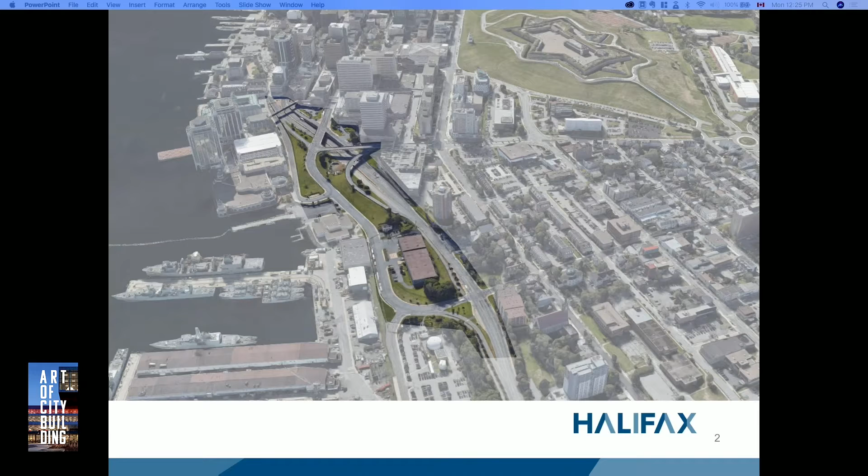But before getting into the exciting details from the public engagement sessions, I would like to provide a brief overview of how we got to where we are today, particularly for those who are not that familiar with the project. The Cogswell Interchange includes approximately 22 acres of land immediately north of the downtown of Halifax and east of what is known as the north end of the city. It's bordered by Cornwallis Street in the north and historic properties in the south.

The Cogswell Interchange is a visible reminder of an era accompanying post-World War II suburban growth in Halifax, and it was part of a much larger project, Harbour Drive, a multi-lane freeway planned to run along Halifax's waterfront the entire length of the peninsula. Now, the interchange was built during Halifax's urban renewal era and resulted in isolating the north end from the downtown and displacing the area residents, as you can see on the right side of the screen. But it was public concern about the heritage destruction, and in particular the potential destruction of what we know affectionately today as historic properties, that eventually halted the completion of Harbour Drive, but not before the Cogswell Interchange was actually built in the early 1970s.

Now today, Cogswell remains as an underutilized single-purpose orphan piece of transportation infrastructure, often described as the road to nowhere. There's been much discussion about its removal actually, and in fact, we've always been talking about tearing it down and replacing it since the first day that it was completed. And interestingly enough, we're not alone in this quest to actually fix or right some of our urban renewal mistakes. We look to Vancouver and their Viaduct project, we look to Montreal and their Bonaventure project, and we also look to Toronto and their Spaghetti Junction in Etobicoke, all very, very similar projects.

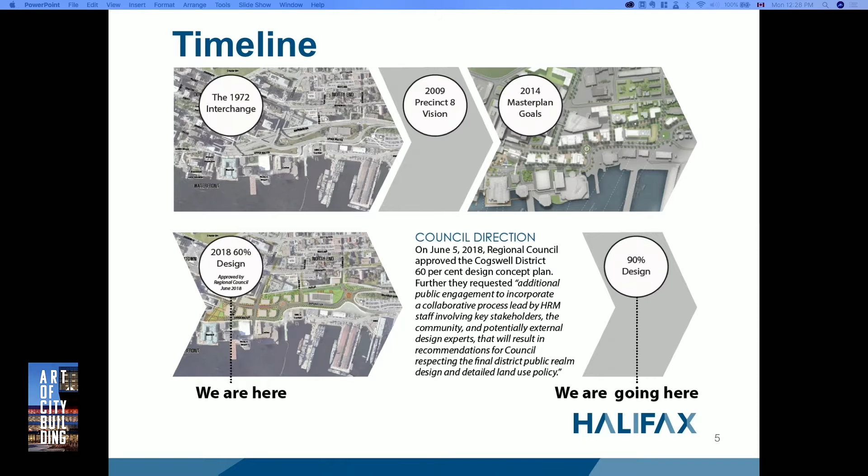Now, the vision statement goes on to say that we need to develop a Cogswell Interchange area master plan, and that should be undertaken. In fact, in 2013, that is what happened, when the municipality engaged Ekistics Plan and Design, a local design company, to develop the master plan for this area.

Input from a significant public engagement session, affectionately known as the Cogswell Shakeup, held in May of 2013 and involving approximately 500 people, served to confirm the direction of the master plan exercise. In May of 2014, our regional council adopted the Cogswell Lands Plan as the area master plan for Cogswell.

The specific objectives endorsed by regional council as part of that plan included, first, that it should be a walkable and transit-oriented neighborhood, with densities supporting increased use of transit. It was also a major objective to reconnect the northern neighborhoods and the areas to the west, to both the downtown and to the waterfront.

Thirdly, to reestablish the fine-grained street grid of the downtown that had basically been obliterated by construction of the interchange, as well as to include well-designed private and public spaces within the new neighborhood. It was proposed to be a mixed-use core, residential being a priority, but ensuring commercial uses to support that new neighborhood, which may comprise approximately 2,500 people.

Prioritization of active transportation is key, and last but not least, there should be a renewable energy district as part of the project. Based on these objectives, staff were directed to take the 2014 Cogswell Land Plan and initiate the detailed design.

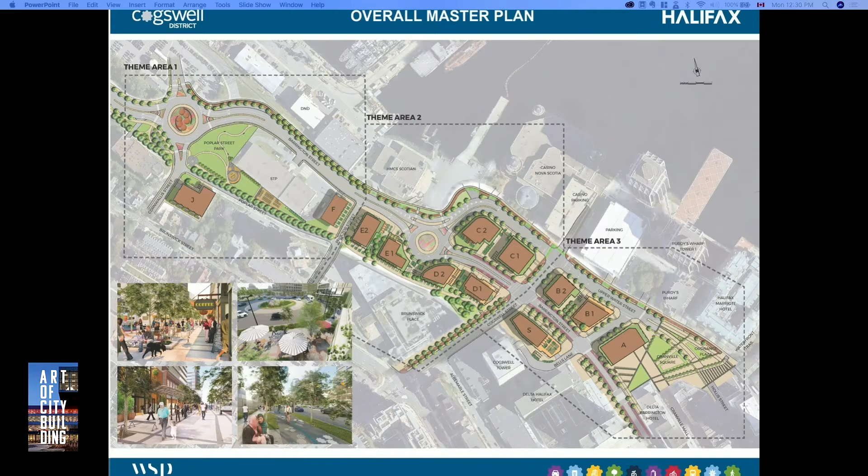It was explained to Council at that time that the design of the public spaces was still very conceptual and required substantial additional work between 60 and 90%. Similarly, it was explained that the design provisions for new buildings had not yet been tackled.

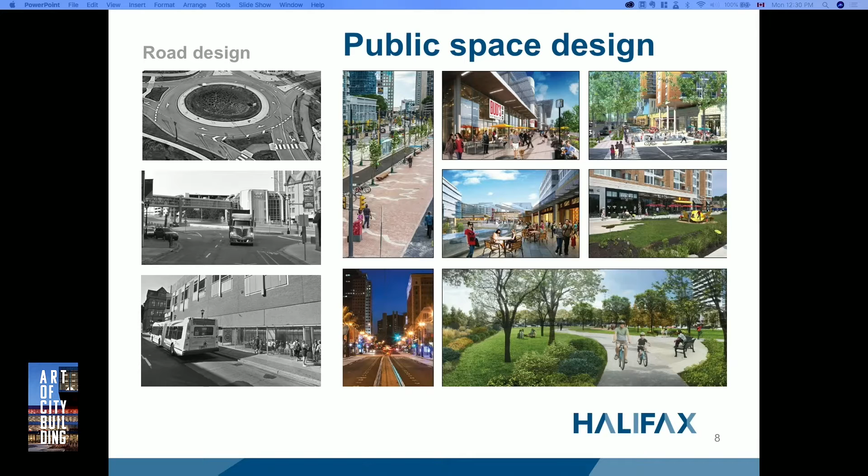Consequently, part of Council's approval of the design was to request staff to undertake additional engagement through a collaborative process led by staff but involving key stakeholders, the community, and potentially external design experts, that will result in recommendations for Council respecting the final district public realm design and detailed land use policy.

Regional Council recognized that the design of the public realm and the relationship of the public spaces to the buildings and their design are key to truly realizing the vision for the district. This would elevate the plan from merely a functional design, showing where things are going to be located and how big they are, to the all-important elements of design: how are we actually going to feel here? How can we ensure we're going to enjoy the space? How can we make it fun, lively, and a place where we want to be?

They also recognized the consultation should be broad-based, involving citizens from across the municipality. To help us with this, we engaged Fowler, Bauld & Mitchell, a local architectural firm, to develop a robust engagement plan and carry it out in conjunction with ourselves and our urban design company, WSP, based in Toronto.

One of the things FBM are well known for is the engagement process that was used in the design of this great building that we're sitting in today.

Also as part of the process, we became quite excited about the opportunity to collaborate with the Downtown Halifax Business Commission and stakeholders on what we're calling the Gehl initiative. We're delighted to have Gehl, a renowned urban design firm, play a constructive role in helping us complete the 90% plan.

I now want to spend the rest of the time I have with you sharing the details of the engagement process, but more importantly, some of the exciting ideas that have surfaced from the session.

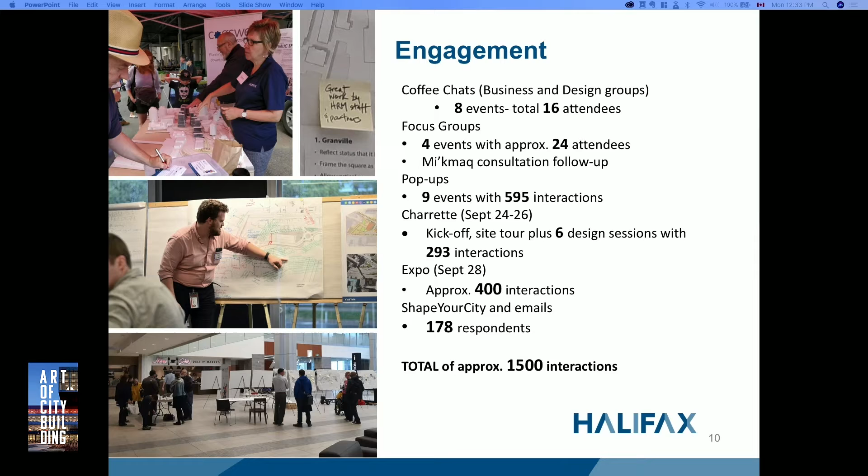In terms of the total interactions through this engagement process, there was well over 1,500 forms of interaction, whether online, in person, or otherwise.

We also included, thanks to FBM—and I wish we had done this a couple of years ago—a 3D model, which was a very effective tool in helping to explain the design to date and engage the public regarding the public spaces and building design discussions.

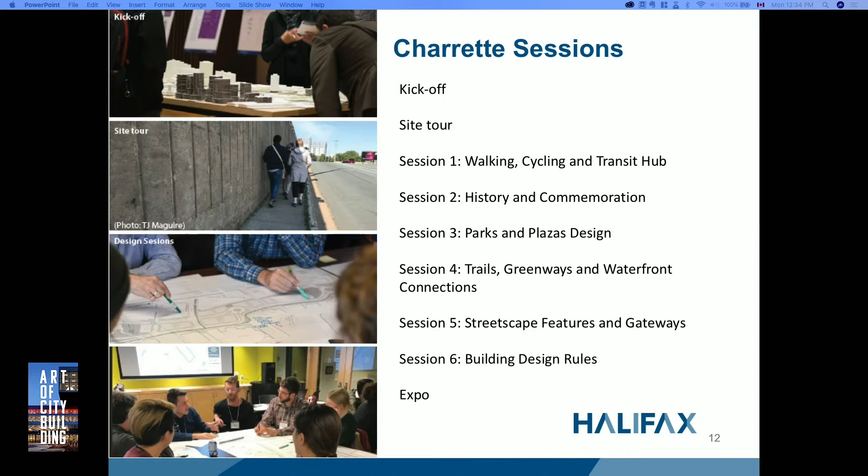The charrette itself consisted of 6 sessions, 5 of which dealt with the public spaces that need further designing within the development, and one session dealt with starting to delve into the ideas around urban design and the building designs themselves.

In terms of the public space opportunities, following on from Ethan's presentation, we not only have 10 great opportunities, we actually have 11 great opportunities within Cogswell. I want to go through those quickly with you.

Starting at the bottom end of the eastern boundary of the project, this is the Barrington Greenway, where we're taking back 9 meters of the traveled way of the street and converting it to public space, a bi-directional bikeway, separated sidewalk, and set within two boulevarded sets of street trees.

It's really exciting—a similar design for the Cogswell Greenway, which extends from the Barrington Greenway up to Brunswick Street, and has the potential of actually continuing on to the Halifax Commons.

Connections to the waterfront are really important. We've identified 4 major potential connections, maybe even 5, which were subject to conversation. A multi-use trail borders the western part of the project boundary, starting in the north, continuing along, following the Cogswell Greenway, coming through the Transit Plaza, and then into the significant urban square known as Granville Square and Ordnance Plaza—a major urban square green space flanking the southern part of the development. Another pocket park, which we had lots of conversation about, is located at the midpoint of the project, and then there's the green space park known as Poplar Park in the northern part of the project.

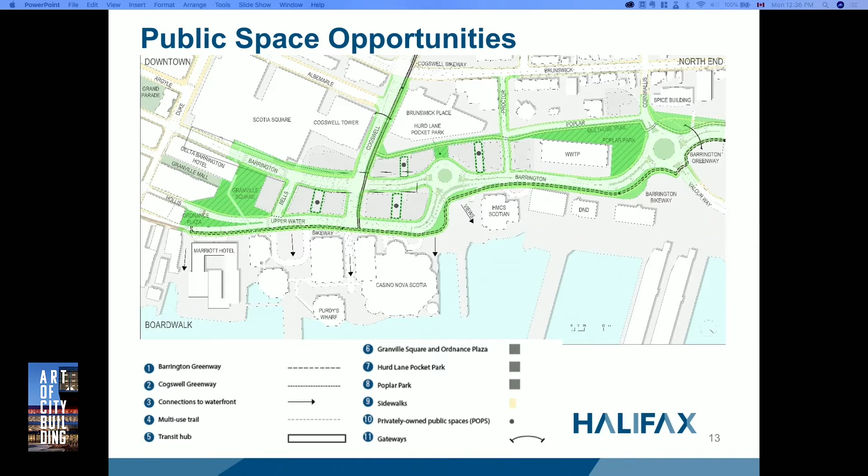In terms of the process, we took those 11 opportunities for creating great public spaces and worked in table sessions using that base map. Ideas were generated at all of the tables, and there was reporting back, which was then consolidated at the end of each session. That occurred over a very intensive 2-day period, including working into the evenings.

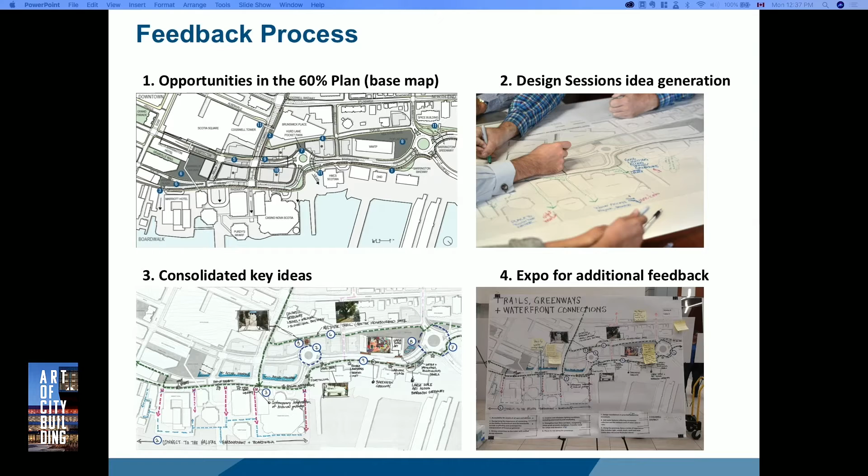The following day, we basically had an expo for gathering additional feedback on all of those ideas. So what I'd like to do right now is share with you some of those ideas.

In terms of walking, cycling, and the transit hub, a lot of people were very excited about the active transportation components within the project. And in terms of the transit hub, there were some great ideas brought forward, including simplifying transit and making it easier to use.

In the transit hub itself, focused on Barrington Street and Bell Street, let's make sure we have exciting, active building frontages in that particular area. And instead of our buses spending time waiting here until they start their routes, maybe we should remove them and put them up on Albemarle Street, for example, to make that a more effective and efficient transit hub.

In all sessions, connecting to the waterfront was really important, and there's a whole variety of ideas that have come forward, both in this session and others, about gateway and wayfinding opportunities to bring people from this area and from the neighborhood to the north into the waterfront area.

Supporting pedestrian activity and movement through this entire neighborhood was identified as a priority, and in some cases some additional crossings and pedestrian crossings and improving the ones planned were talked about.

Connecting the north end to the new neighborhood was an enduring theme, and one major direction suggested was that not only should Cogswell Greenway be constructed to Brunswick Street, but there is strong support for continuing that greenway and bikeway all the way to the Halifax Commons.

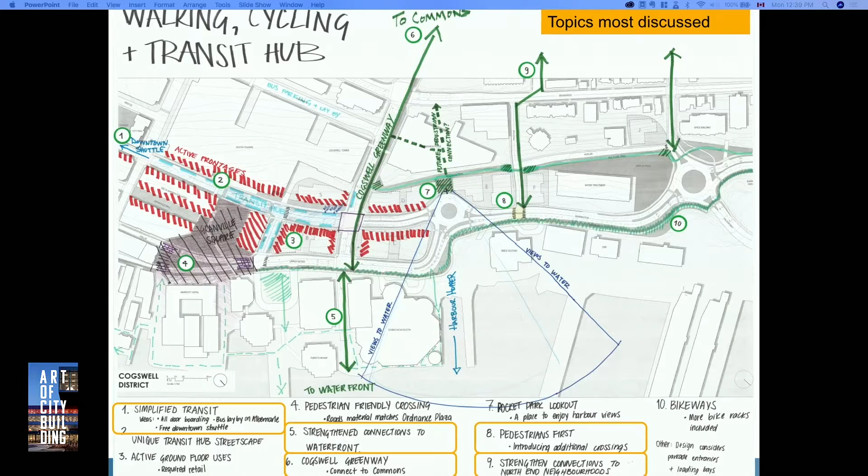There was also discussion about a major area where we need to do some more thinking: how can we, with these new street connections, both Proctor and Cornwallis, really facilitate that linkage to the Gottingen Street neighborhood.

History and commemoration: a variety of topics were talked about, how in this particular area we could celebrate history and commemoration. We talked about ways to commemorate the story of the urban renewal activity that has gone on here, the freeway plan itself, and the fact that it was stopped.

These could be conveyed through ideas like photos of the original neighborhood, keeping a piece of the interchange as a Berlin Wall moment, for example, or even going so far as keeping a large part of the interchange, believe it or not, as an elevated park.

As I mentioned, we met with the African Nova Scotian community and had several conversations with the Mi'kmaq community. What was very clear to us and to them is that their presence in this area, which they've occupied for a very, very long time, is not known, is not seen. They see this as a huge opportunity for them to become involved in making that presence known. So we're pretty excited about that.

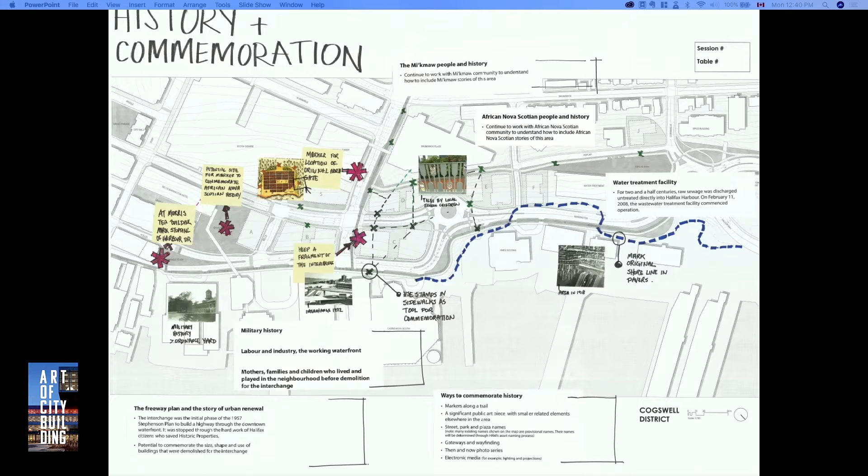We also touched on a number of topics of history relating to the water treatment plant itself, including the original shoreline of the harbor and our military history with DND being so close. We also discussed a variety of ways that commemoration could happen through small and large art projects, civic asset naming, decorative paving, electronic media, and a whole variety of other ideas.

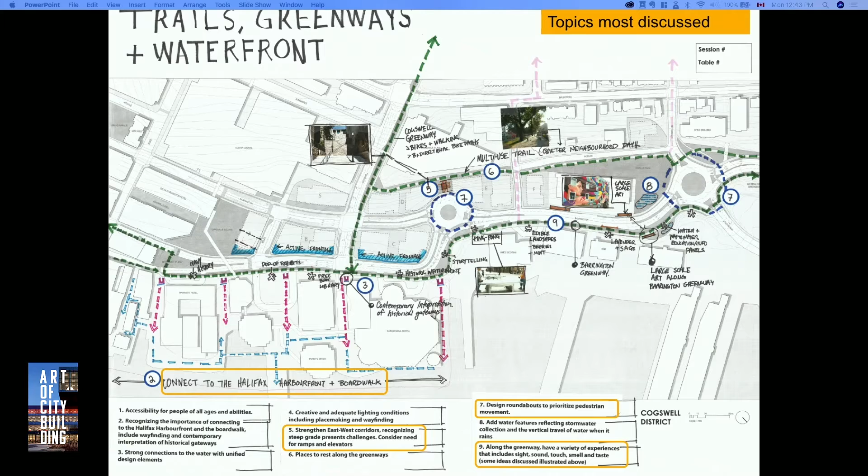Recognizing that the east-west movements in this particular area are quite challenging because of the grades, how do we deal with that? And also along the trails and greenways, have a variety of sensory experiences and activities, such as learning activities, arts and murals, edible landscaping.

Streetscape features and gateways. Highlights here, one of the major ideas was that the intersection of Cogswell Street and Barrington Street really came forward as the heart of the district. And because of that, we should pay particular attention to the designs of the buildings in those areas, their relationship to the street, perhaps some ideas around small plazas based on building setbacks, some unique streetscape elements there.

Maybe that should even be a scramble intersection. The roundabout here in this location was recognized as a predominant gateway and could be space for a marker or public art. As well, all of the sidewalks and greenways here, a variety of street trees should be provided.

I actually have 2 minutes. Gosh.

Over 270 street trees are actually being planned as part of the project. So I just have a couple more slides.

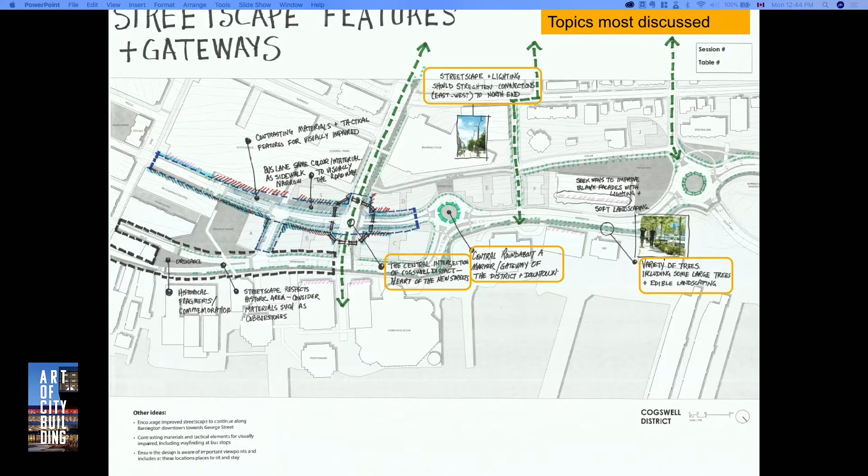Building design. Of all the sessions, this is the one that generated the most amount of interesting dialogue as well as controversial dialogue.

Some of the key ideas were that within this area, we really need to pay attention to the surroundings with respect to the designs of the buildings. The southern end should integrate with the heritage nature of that particular part of the development. The center part is an opportunity for lots of interesting articulation and details at the lower ground floors, varying street faces, and active frontages as well.

It was even suggested here that maybe this is the location for an iconic tower design. And in the north, the design should integrate and relate to and blend into the northern part of the development.

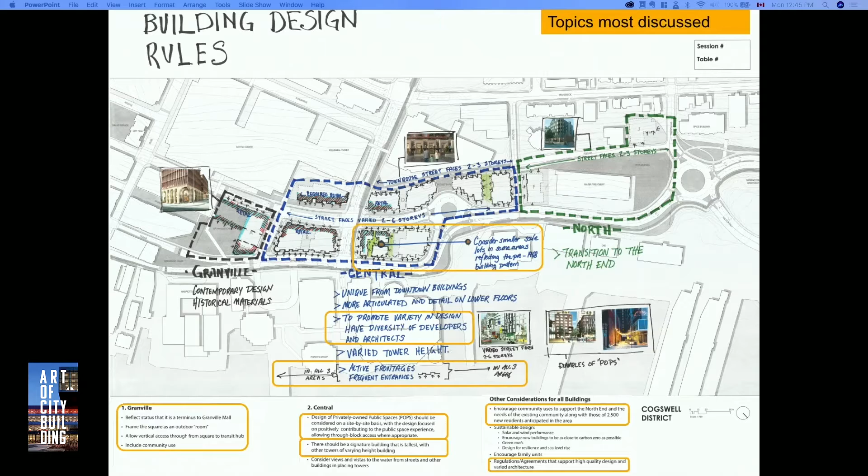Other ideas that were discussed include affordable housing and interim uses on vacant lands. I won't go through the entire list, but there were lots of additional items beyond just the public space conversation. In fact, there were over 100 ideas provided to us through this process on public spaces, and over 50 ideas provided to us on building design.

So the process was very exciting, and we're very pleased with that level of engagement. We think we can really move forward with that input to ensure this is a people's plan for this new district. We're now going to be working with our designer, WSP, as well as GAL, to make sure we can include as many of these ideas as possible, and we think many—if not most—can be included in the 90% design.

So in terms of next steps, our goal is now to work towards completion of the 90% design based on the input we received from the public, take that back to council for their review, and then based on their direction, move forward to engage a constructor and look forward to the demolition and ultimate construction of the new neighborhood. Thank you.

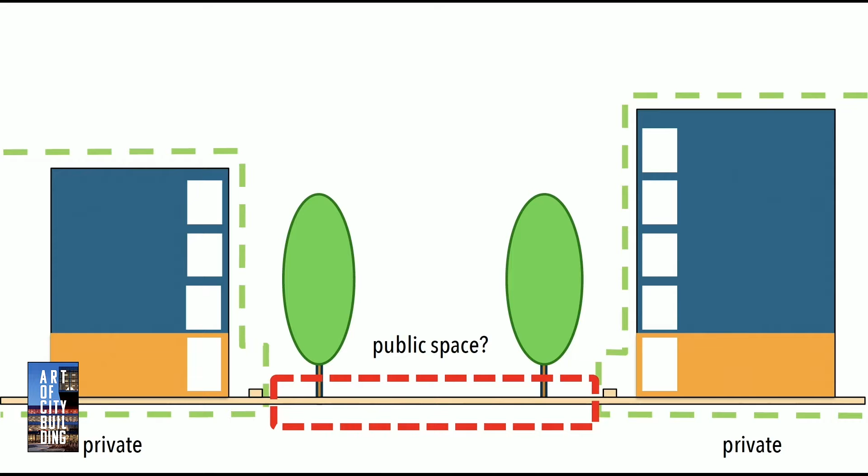Second lesson: when cities talk about public space, they often mean the horizontal surface that they own and manage. So is this public space? But if you take the perspective of the pedestrian, you and me on the street, experiencing the environment - this is not public space, but this is public space, including the facades of buildings. The most important part of the building is the ground floor space that you see when you walk down the street. So what we say is the ground floor may be only 10% of a building, but it determines 90% of the street experience. So actually, with the buildings, you help co-create public space.

Third lesson: there's this difference between space and place. Do you know Maslow's pyramid? This is Maslow's pyramid for human needs. As a human being, you first want to have food, shelter, a roof over your head, and be safe. Once those desires are taken care of, you want to develop yourself, be social with other people, etc.

What we see is that with public space, the city tends to take care of only the first two layers of this pyramid of Maslow. So the public space is clean, it's safe, it's whole, but it's not necessarily a place where you want to be, where you feel at home, where you feel inspired. That's where the place-making idea comes in, and that's something that the cities can't do alone - that's why we need everybody.

That's a co-created process. The fourth lesson we take out of the book is that when we talk about the quality of public space, it's not only about the hardware, the design, the way we design it. Very often, if a space doesn't function, a city will react by having a new design made and then hope everything will be good afterwards. But very often that's not how it works out.

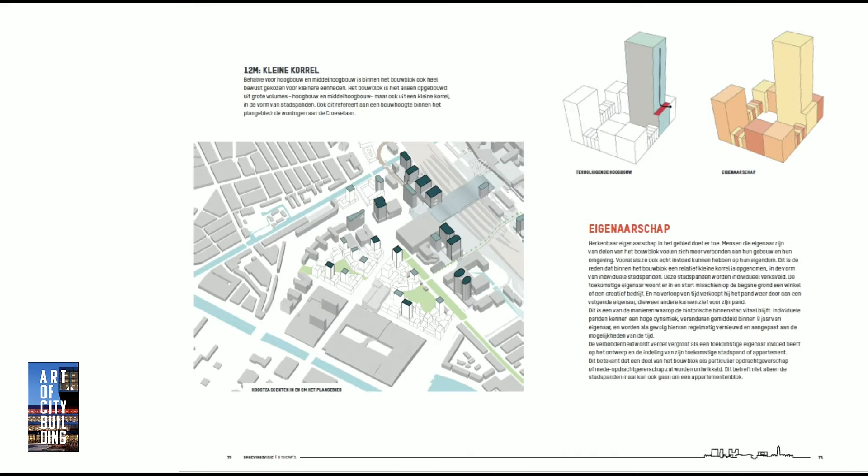So what you see here is that there's large volumes to be tendered, but there's also small townhouses to be tendered. These will be private investors who will be part of the urban block and who will create a lot of diversity in the streetscape, a type of diversity that you will never get when you do this one block, one developer type of development.

Then it comes down to the management, because great public spaces you don't develop overnight. They are created layer by layer over the course of decades. So you need mechanisms to keep working on the quality and keep improving the quality of these public spaces.

So this is a project that we've been working on in Rotterdam, Schouwburgplein. It was ranked the ugliest square in the world by Project for Public Spaces, so we're really proud of that.

Actually, it rains in the Netherlands, and somebody thought it was wise enough to put iron on the floor. So when it rains, you slip and break your hip.

So we got the cultural institutions to work in a coalition together, to each chip in, and then to launch on a placemaking process. Now we knew that we wouldn't have the money to change the square physically from the start. That's going to be our long-term dream, but we can activate the square in the meantime.

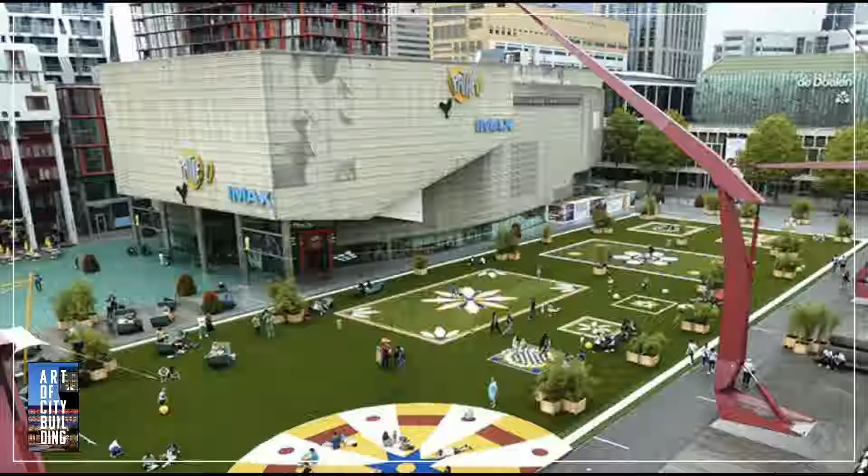So we had these guys who came along. They have the flying grass carpet. So they put the carpet down, and now we have small pockets and places in the area. And on a warm day, you will count up to 80 groups of different people sitting down there. Whereas previously, nobody would use the space. It would be a void.

So good management. Great places not created top-down. They're a game between bottom-up and top-down.

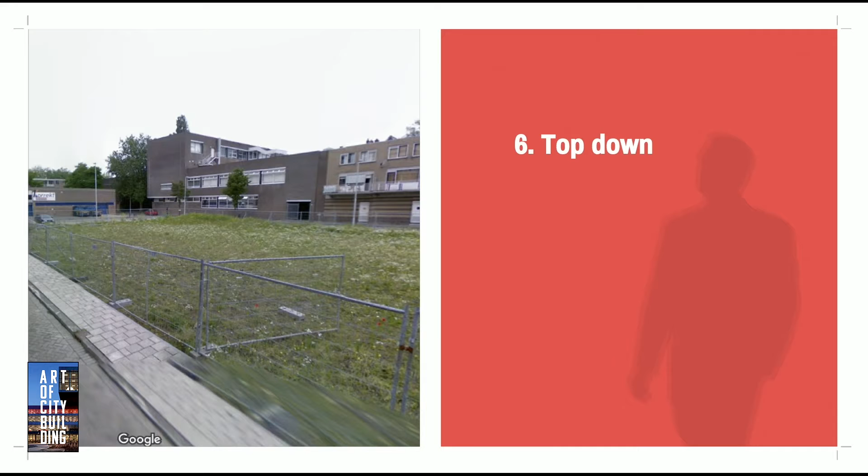So for instance, this place in Rotterdam that we were working on, we ran into this chef who said, from the neighborhood, he said, I want to work on healthy food for the less privileged kids. And by the way, I also collect trains. And we thought he would, midlife crisis, still playing with trains. But he actually meant trains.

You can see that this is the chef, right? And he proposed, he had a former East German restoration wagon and 40 other trains. We still don't know today where he keeps them.

And he asked, can I put my train in this terrible space and then have a restaurant and then employ the kids from the neighborhood, the unemployed kids from the neighborhood? And then he started growing his vegetables and herbs in the garden in front of it, and he turned the space into a place. Now, there's no way in a master plan that I could have written this down, even if I would have wanted to. So this you only create if you have a process and a game between the bottom up and the top down, right?

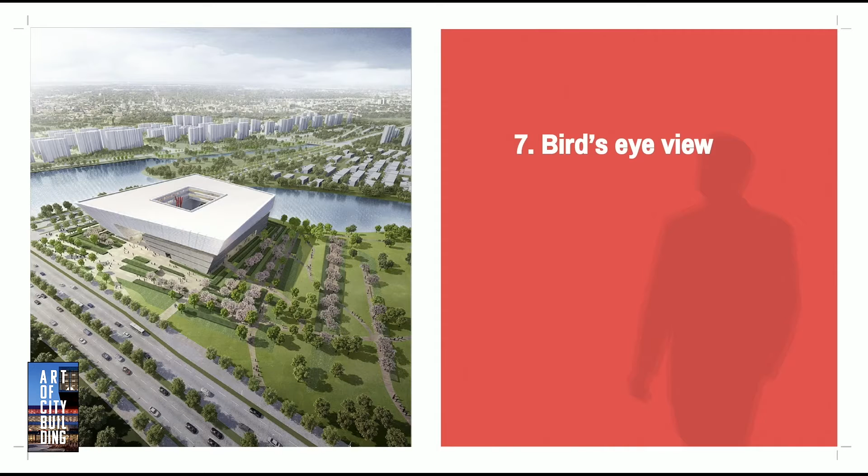And then lastly, there's this idea of bird's eye view design. This is typically the kind of way designers present their design to you, but we're not birds. So I started to get annoyed by these sorts of designs. Actually, I want to walk past the building and have that experience, and I want a designer to have that experience. So how could we do that?

So we ran into the Technical University Delft, and now we're working with virtual reality to walk past the designs of future buildings. And that will change the way designers, developers, and politicians will view the building. We don't use VR at the end of the line to sell the project, which is often done, but we use it at the beginning of the project to prototype and find out what brings human scale to the project.

Thank you very much.

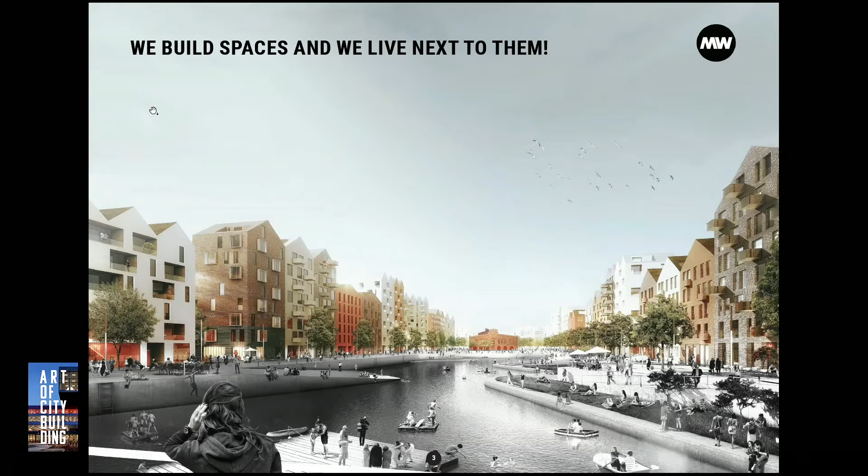Hans also mentioned this—it's been mentioned many times today, and we saw it in the diagram. A public space isn't just a flat surface of a street; it's made up of the walls, etc. It's three-dimensional. In our office, Mandaworks, we think that we build spaces when we do planning. So in the process of planning and design, we can address how these companions, the buildings on the side, can and should act to support the wishes of the spaces. We don't stop by talking about the spaces—we continue and talk about what builds the space, the walls and the ceiling.

Because we need to understand what the purpose is of the public space. What is it that we want to do? What is it that we want the public space to achieve for us? How much sunlight do we want on this public space? How little wind do we want going through this space? And what do we want to happen on the sides of this space? Together they make the image of the world that we envision in the projects we work on.

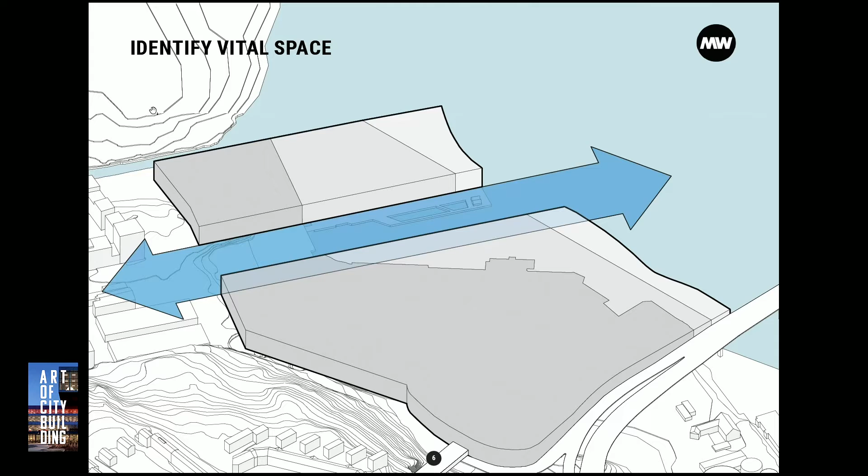So, as architects of our cities, we need to identify the spaces that we want to happen. This means that we need to look at the measurements, we need to understand how people would like to use them, we need to understand the programming of the spaces and its surroundings. We need to understand the layers of the cities, and as much as we think of the future, we need to understand the history. This is very important, and it was brought up about Cogswell earlier today.

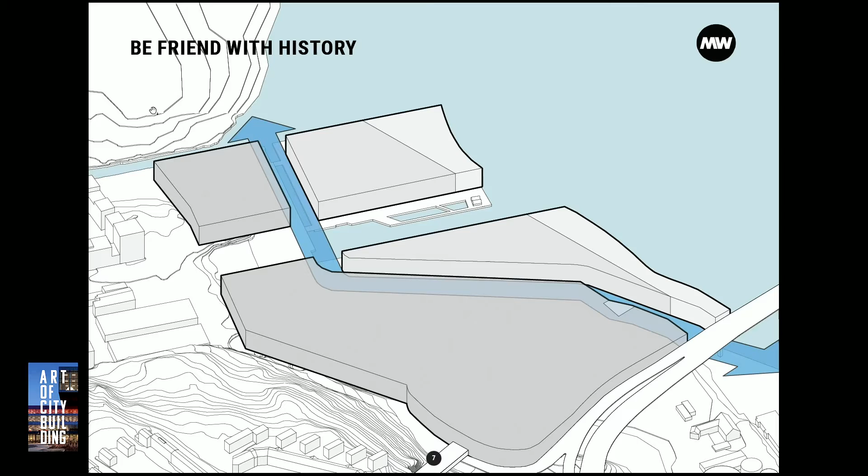Because if we do this, we can bring out what we call the hidden layers. The layers that we don't know of or have forgotten about, but that can give us a lot of asset to the design of the public space.

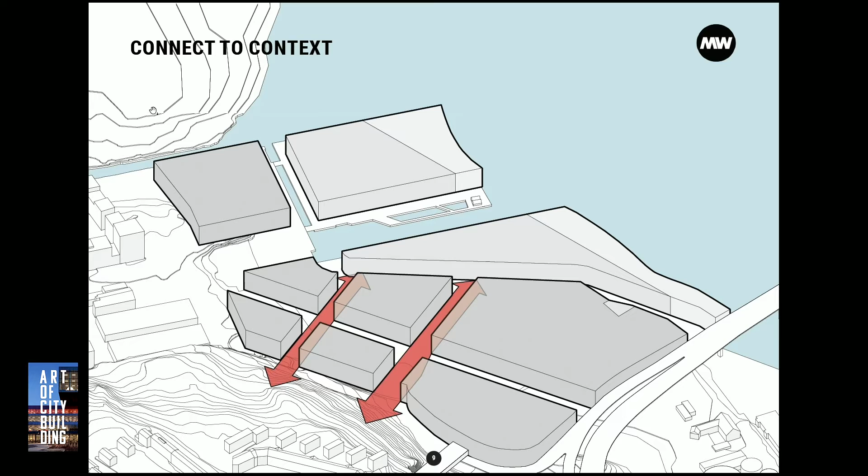This is a design of a new canal that we brought forward due to a history of use of water, and the two sides becoming a public space. This is how we like to work in our projects, to bring in the narrative, the story, from the empty paper to the vision of the future. Because this is very important, to understand the meaning and why things are the way they are, or the way we want them to be.

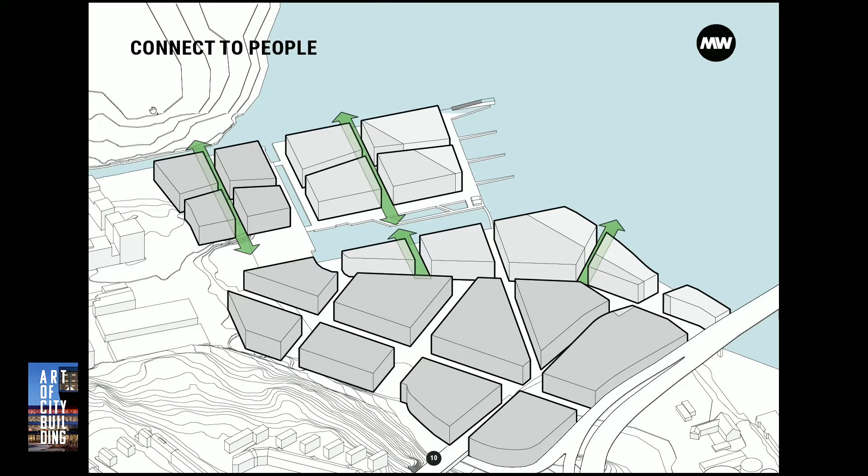So we connect by making connections through streets, spaces in the city. And together this makes up a family of public spaces. And the public spaces, they set the tone for the possibilities of this new neighborhood, because these are open houses that invite people to take care and to take part of the city.

And as I said, the walls, we need to work with the walls. We need to push down and we need to pull up the buildings. We need to work with the heights, the programming, the density, and the effects of this. A tall building gives more shadow. Can we push this building down a bit to pull it up somewhere else?

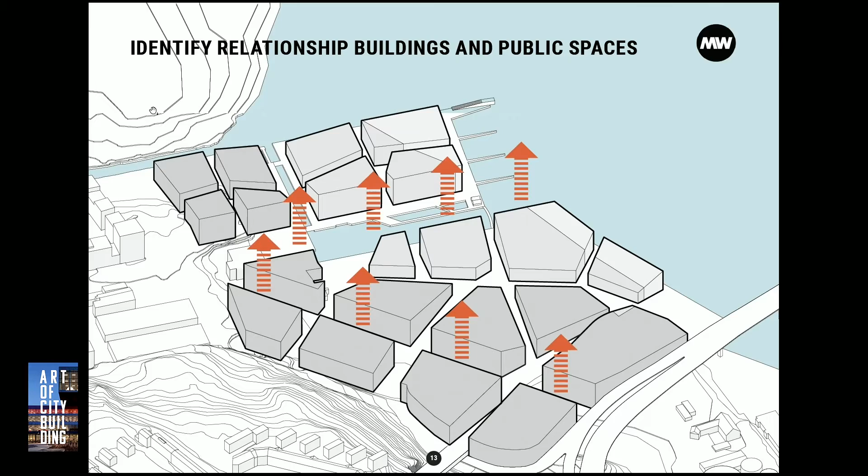Can we move programs around to actually focus them around the important public spaces? Because not every street, not every corner of a city is important. So we need to find the balance on where we create the most life.

This is one of the projects we work on in Stockholm. It's called the Royal Seaport.

In the work that we do, we deal with three types of public spaces, and I'll show you a quick example of each of these ones. One is about the creation of a public life, a public space in an existing situation. The second one is where we reimagine a space maybe that has been lost. And the third one, which is the one we work the most with, it's the new space, the new city, the new part of a city that doesn't have what we now are imagining.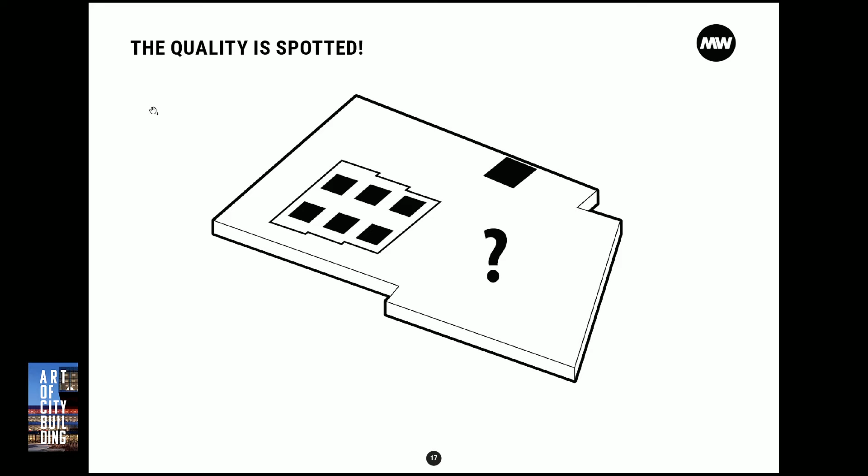So we take a boat or a plane over to Iceland. This is one of the projects we work on now, about creating a public life in existing space. There's an old bus terminal that sits here. The bus terminal has been transformed into a very popular food court, functioning as a meeting place for the neighborhood. Anyone waiting for the bus will pop in. We have identified this, and we understand it, and we love it. It's a potential to build further on.

So we give a support to this bus station, this new food market. By doing this, we understand this space and the basic foundation of the new energy that has arisen here. By following this, we also get the people here, the people behind the food court, the developers, the city itself, to come along with us. We're all happy together.

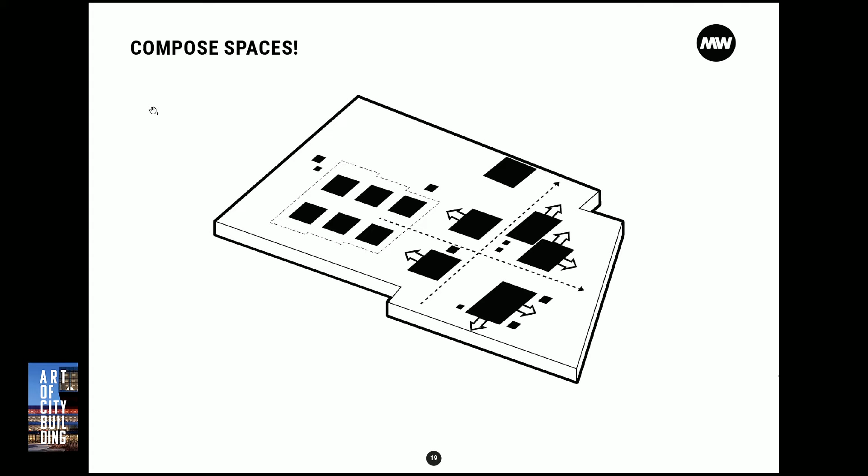We compose the space by dragging apart the new functions. We activate the spaces by creating a framework, and we introduce protected public spaces.

Because after all, this is Iceland. It's +4 in the winter and it's +11 in the summer, and it rains a lot. Again, this is about the climate. People don't use a public space, a green park, the way on Iceland as you do here or as you would do in Southern Europe. But they use public spaces. And we believe by giving them an alternative of the green open park, this is attracting people.

So going from this empty area today, we envision a public space where you can't tell what is inside and what is outside, where the program moves in and out, and this is together with the municipality.

So when working on this space, we also looked at the scale of it, because the scale of a space says very much about the function that you want to have and the feeling as a person you want to achieve. Many times when we have open spaces, we talk about how can we bring down the scale? How can we make it human? How can we make people feel home and safe?

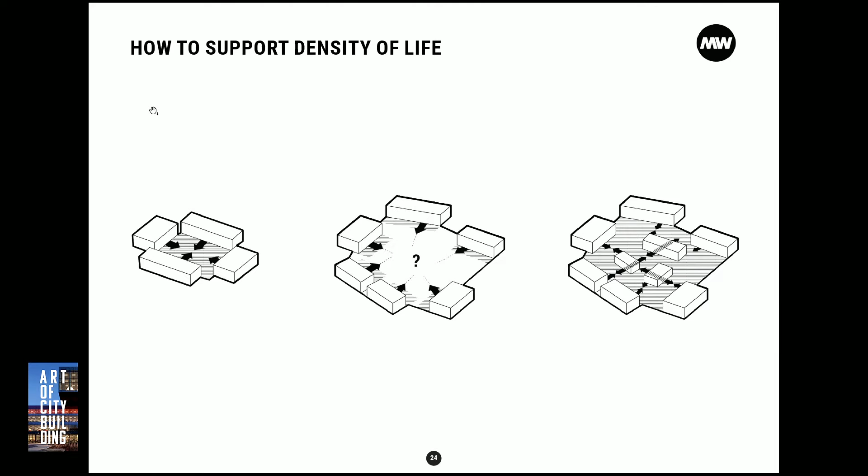Many times with big historical squares, we have a massive program on the side, restaurants, bars, and many other things. In this case, we didn't have that. So this gave us the reason to move the buildings into the square and compose smaller units between the buildings.

Because we think that the space is a private and a public space combined where people want to feel home.

The second project is a bit of a disappointment. We were part of a final this year in this competition and we didn't succeed, but I still wanted to show you this project. I think it also has a connection to your project here in Halifax, because this is a situation very much based on the modernistic idea of transportation, and now the city of Montreal is dealing with this.

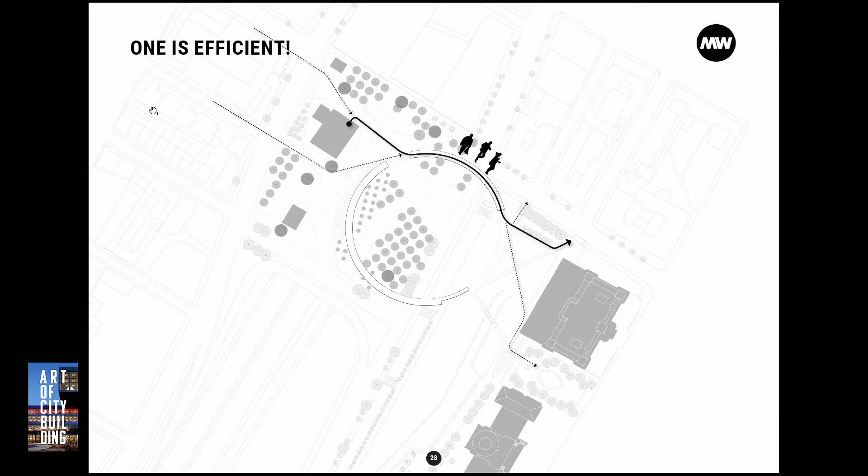So in the idea to connect the two sides of this river bed of transportation, we invented what we call the ring. The ring was a bridge made out of two arms, one to be very efficient, bringing people from one side to the other, and the other one to be a pleasant route.

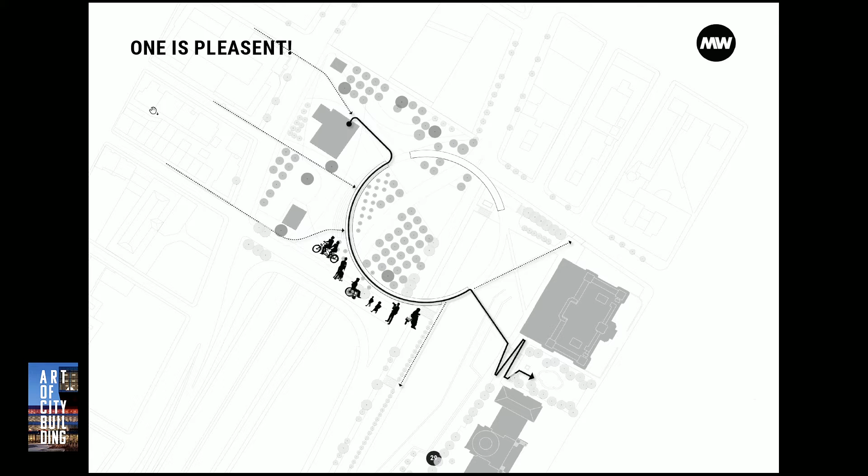Most important, it was bringing bikers to cross this space, because in the brief of the competition nobody thought of how to bring bikers across. Coming from Stockholm and seeing the changes in attitude towards biking, where the city cannot find enough space now for the amount of people that want to bike, in a city where everything goes up or down, nothing is flat, we think bikers are so important. So that became the second arm, together forming the iconic bridge.

This is something we also have to think of when we think of public spaces and how to identify qualities and the memory in people's heads about the spaces. That's the iconic side of it too.

So creating the idea for a large space in people's mind, Halifax demands a good landing, a strong relationship to history, a new innovative function, a proud and bold design. And most of all, it has to have a link with the local community and its users.

And in this particular competition, we were also asked to envision a design of how to commemorate the lives of 9 throughout history important Canadian women. This again links back to Cogswell and the idea of linking back to history.

And what can you do with this? You could place 9 statues, or as what we did, we developed the idea of transferring the history of their lives into spaces related to their functions, design, or meaning to each of them.

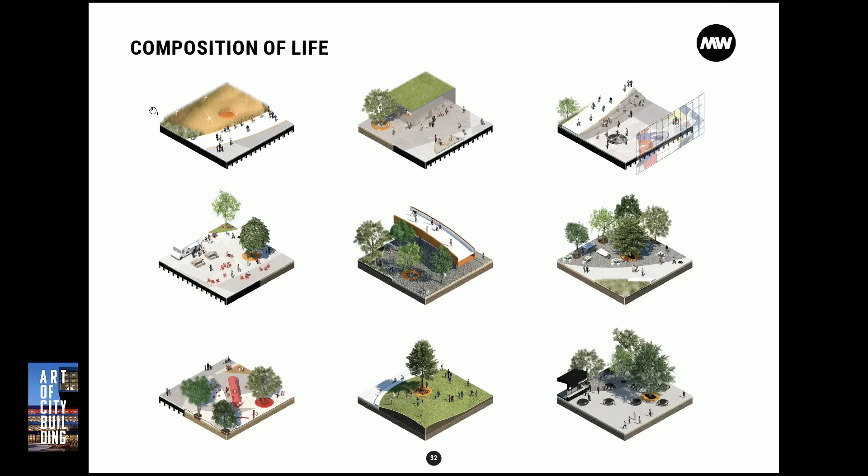This approach was a way to create multiple spaces with their own identity, all within one coherent design, present to some, hidden to some others, but it gives us a knowledge to history through spaces.

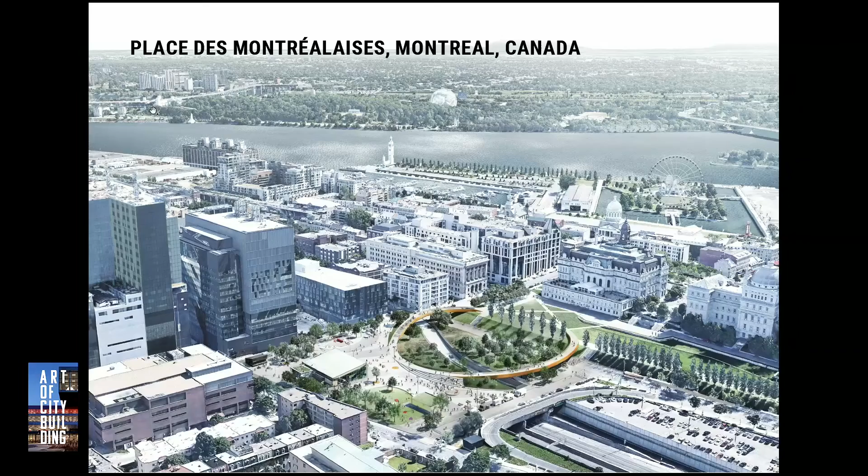So this is what it looks like today, and this is what we thought it could have looked like in the future.

The third example, the intervention of space, is a journey what we call the Space Odyssey.

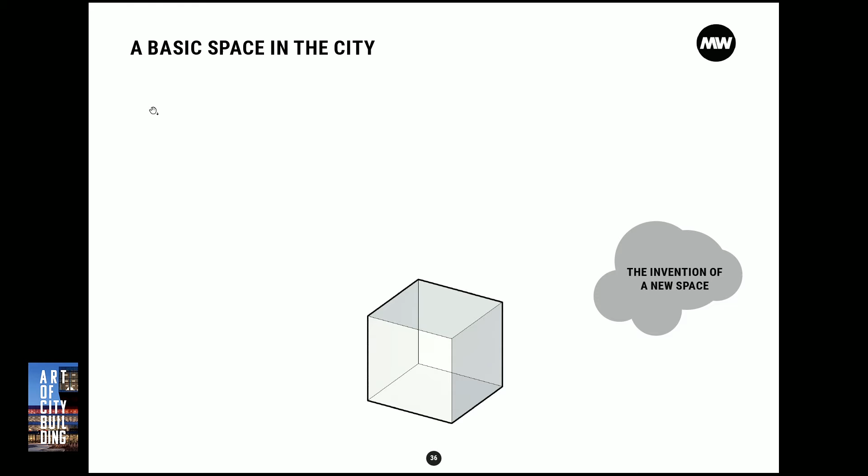When we talk about the three-dimensional space, we start out saying it's a box, it can be any shape, but we start out saying it's a box. It gives us a starting point of understanding that this box has to have a certain measurement. It needs to be big enough to be able to function to whatever we want it to do.

And this is a box becoming squeezed in at the top. Why? Because there are other programs that need to be added, and the people coming in on the street need enough space on the lower bottom. So what we want to do here is adapt it to become.

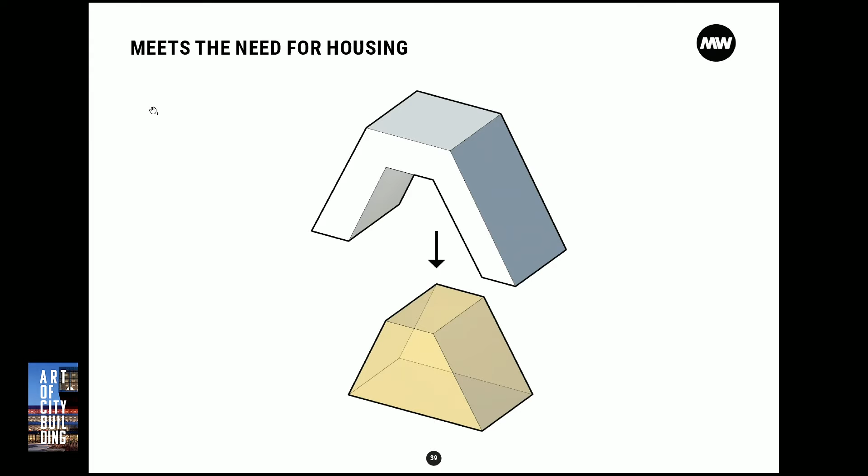And it becomes a space of possibilities where it can meet other programs such as housing, becoming two sides of quality: one very exposed, that's the housing with balconies, getting the sunlight, possibility for growing on your balcony, and it creates the protected space. Together they could coexist.

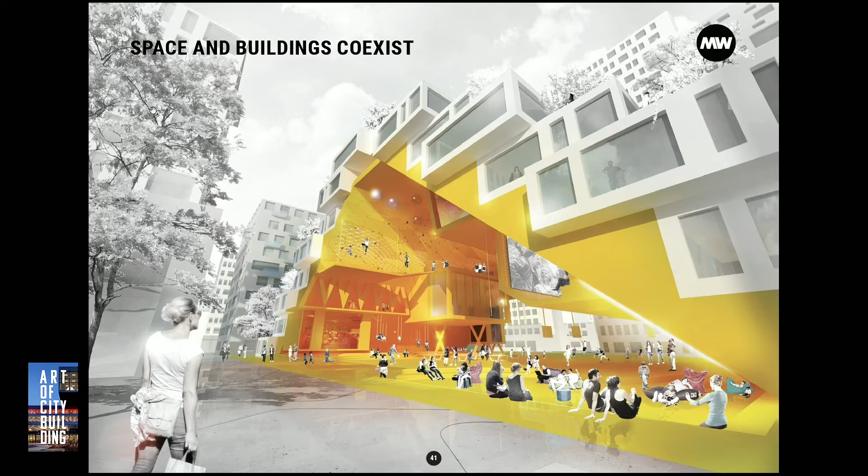So thinking of this, if we would give ourselves an exercise in urban planning, always saying that when we work, we have to do it hand in hand, space and building. That puts a lot of new possibilities to us, because you're not going to let one hand go if it's a good friend of yours.

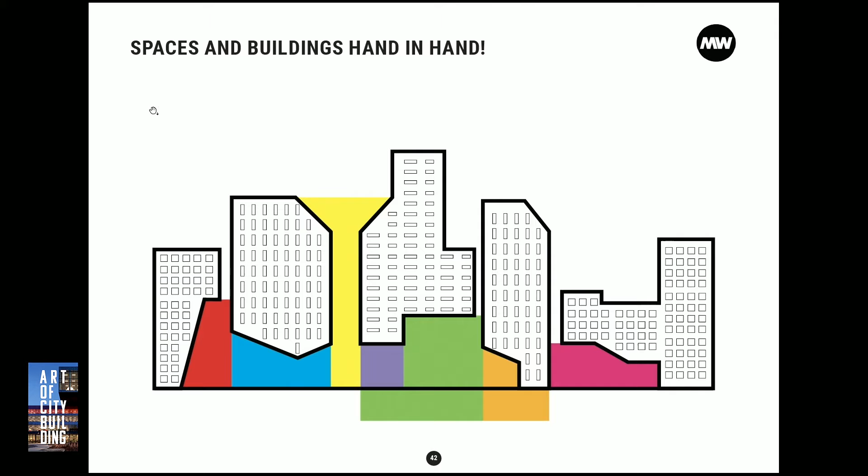So the space will inform the buildings, and the building can inform and support the spaces, along with the program you add to the buildings, etc.

So in this research project, we developed all these kinds of volumes of spaces, and they're all related to the sizes that were needed. Anything from an outdoor cinema to the space a tree needs, to a number of benches or a public transport hub, etc. And we matched them with the density of program that we needed to fulfill.

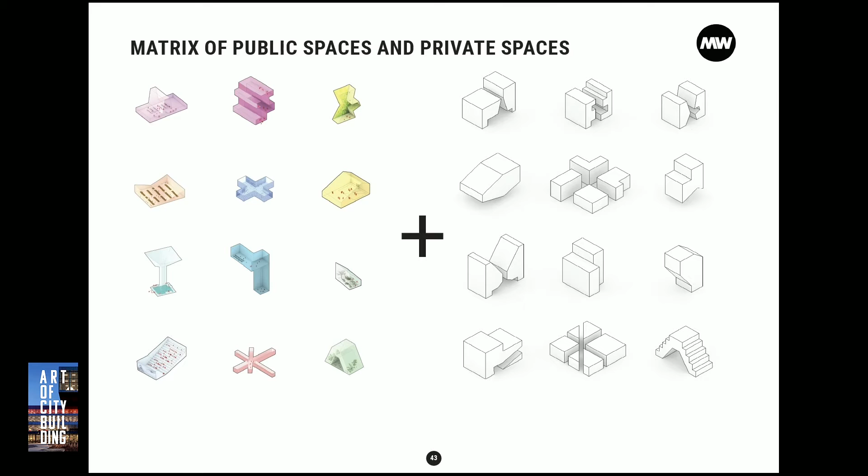In the end, we were able to give the city back the same amount of buildings they proposed, but with a lot more public spaces, because we moved them together and let them inform each other. So again, space and buildings in coexistence.

To get from A to B can be done in various ways. Everyone knows this. One place and one experience can happen at the very beginning or at the very end, but we believe it's much funnier and a much better city if it happens along the way. In any good city planning and in a good existing city, those two things can, of course, live next to each other.

We tried this in one other competition that we worked on. We were a bit more successful here. We were actually the winners. This is in a city in Finland, Vaasa.

The very direct answer to building out the city here would be to fill out a grid system, to continue the existence of the city. Out of the 60 proposals, when we came up with this idea, we thought everyone is going to do this. I found out later that about 55 other proposals went the whole other direction. People tried to build islands, they tried all different shapes, anything to break away from the existing city and the grid that was already there, a historical grid.

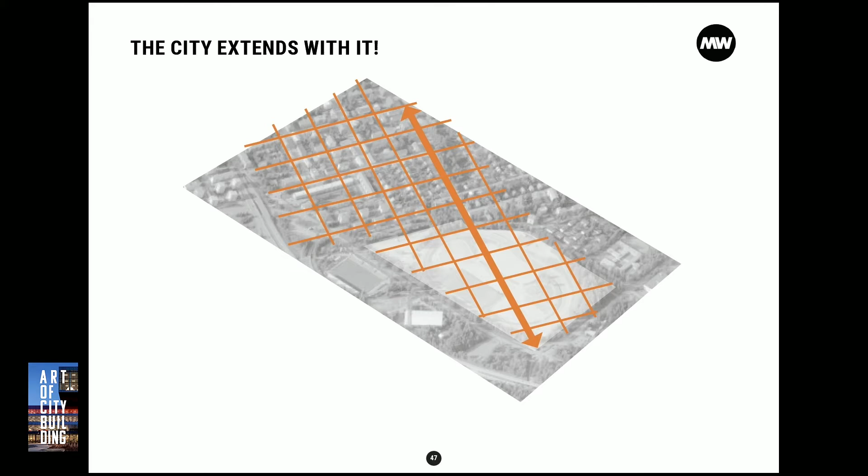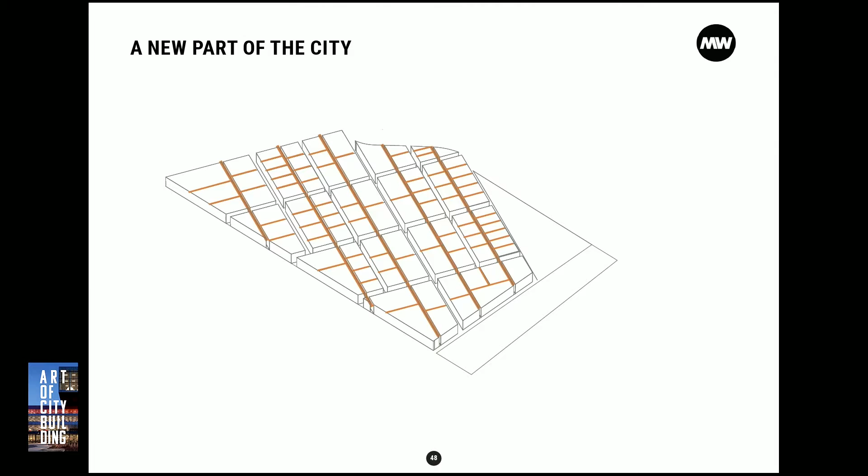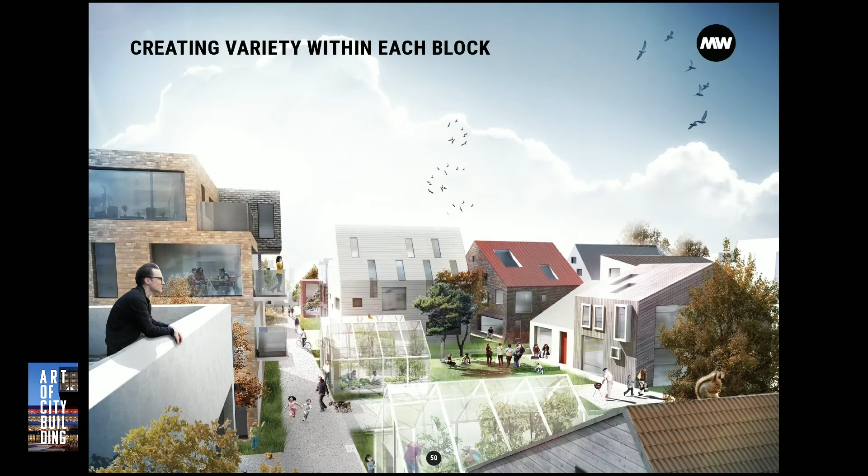Within the plan, we added streets and social alleys and small ways to break down the scale of the blocks, to allow for different typologies of housing, so that you would have your social alley where you meet your friends and play on the street. But within one block, a great difference of typologies also allows for different ways of living.

Then the key twist of the project goes back to this diagram of the straight arrow and the curved one. By adding this intervention of what we call the diagonals and connecting the district with surrounding important spots, such as the school, the sports stadium, the hospital, etc., we put the new area within a context. We open up the doors for others to walk in, to be part of the city district, and of course the city district to reach out to the surrounding functions.

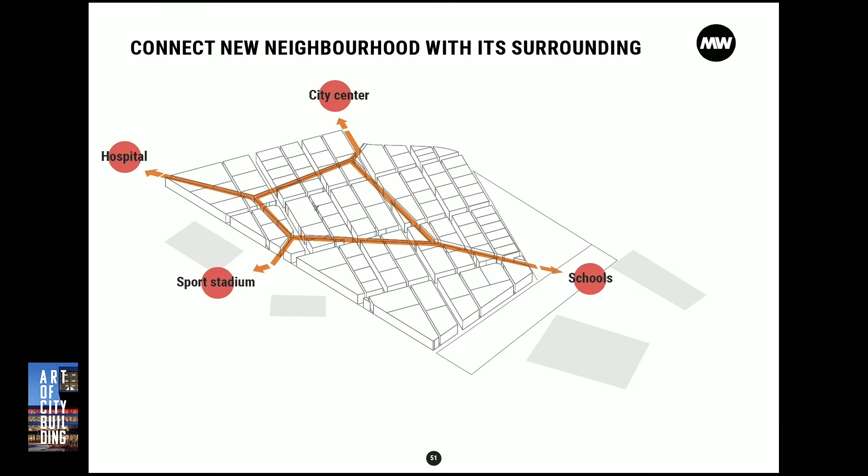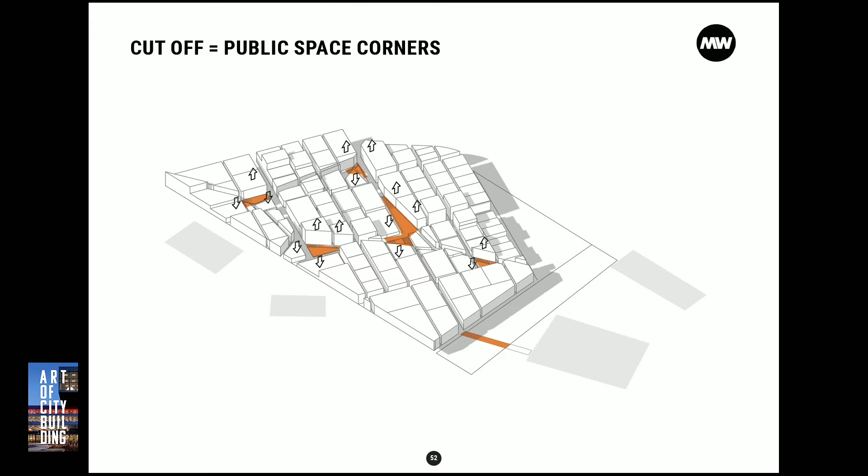So we simply cut the blocks and created strong passages through the urban fabric. The meeting point between the grid and the diagonals became public spaces, or corners as we call them. So spaces along the way.

I'm sorry, but this is a bird's eye perspective. I fully agree, you don't get away with a design from a bird's eye perspective, but it's a good image to be part of your story along with other images as well.

Now we go really down between the buildings. We are driven by the idea to do better, right? In order to do so, we need to understand when we did good, and when we do good, what is it that we could do better.

We very often talk about how we learn and how we move forward and will do things better. But many times we need to look back and understand what we did great. The idea of how to build cities isn't a linear development. It takes loops, it goes in the right direction, in the wrong direction, and takes many turns. So I think we have to have this awareness, that we constantly make mistakes. We talk about this in the office, that we all need to allow ourselves to make mistakes, because by making mistakes, we create success.

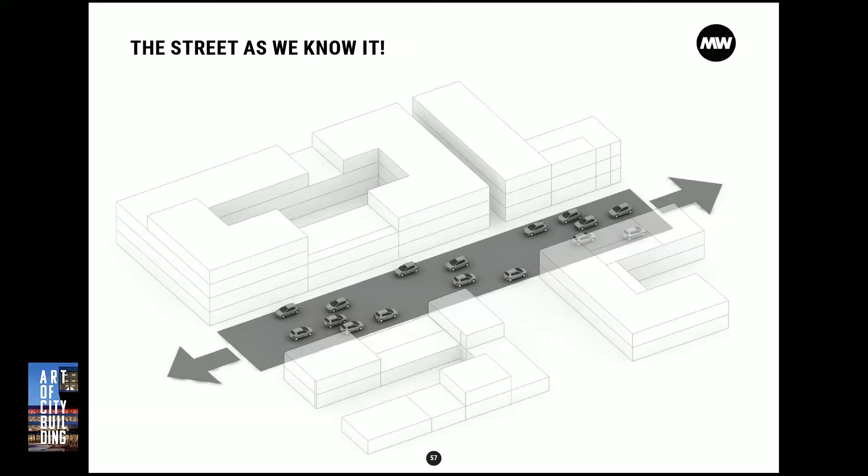So this is the last project, a few slides, with a question on where are spaces to be found in our city. This is the city street as we know it. In any city throughout the world, we've gone through this period of giving transportation of cars space enough, as we have always thought, to go through our cities.

We know that we're also looking at this at this time, where we hope to shift the idea that cars are the dominant and the most important figure in the city, but others are. So we turn around, we say that people and bikers, etc., are the priority in our cities. And I think everyone agrees to it, and we know of this.

And the consequence of this is, of course, that we give more space to people on the sidewalks or on the bike lanes, which is excellent. It's easier to bike through the city, it goes faster, you get broader sidewalks, so you can do more shopping, you can have a coffee, you can actually stand and talk to your friend, and you can plant more trees. It's all excellent.

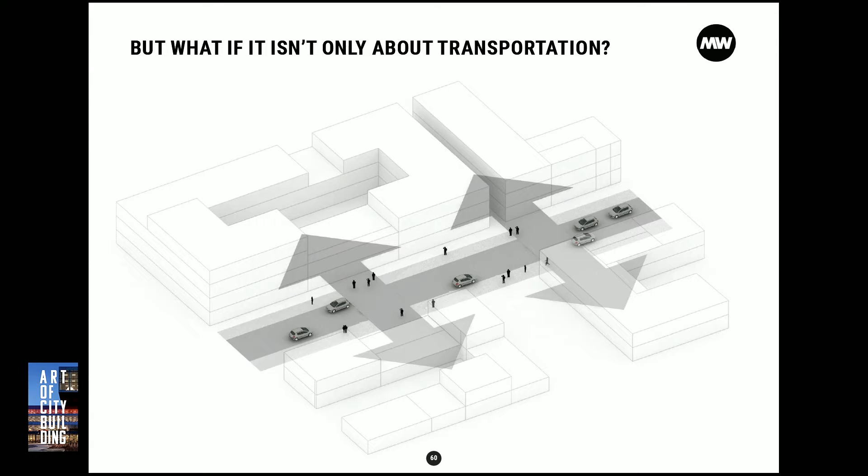Well, you can take it one step further, though, we think, because again, our lives aren't only about getting from A to B the fastest way. Living and moving around in the city is much more about meeting a friend, your shopping, going to work, and many of these things that aren't about the most efficient way of acting.

And if you start to look at older cities and how you would have shops across the street where you would go and buy the cheese and then you go across the street to buy your bread, etc., and understand that the street itself is made out of sequences, places itself, then we also get a different eye to our streets in the cities.

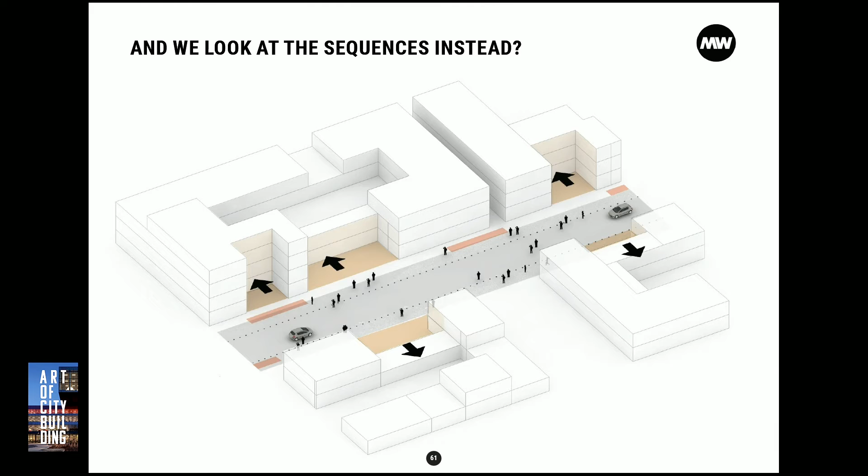And this can push us as developers, planners, architects to think of how buildings can help this to happen by pulling back the buildings, by allowing spaces to happen, and to let people actually cross the space and let the cars wait.

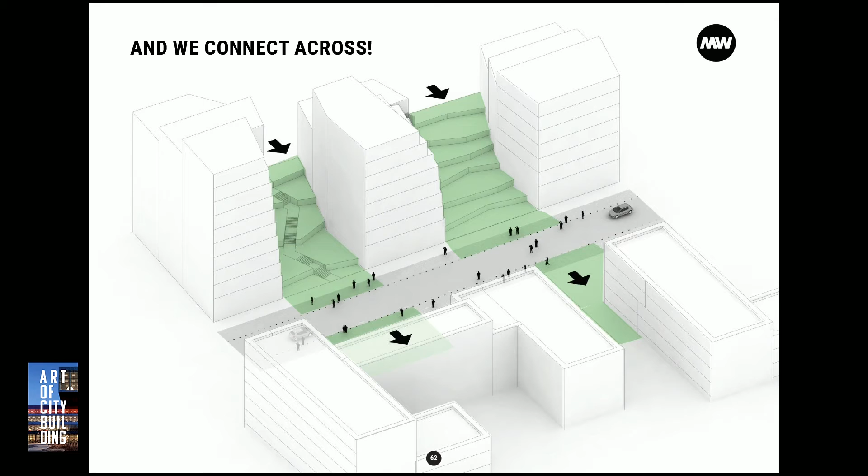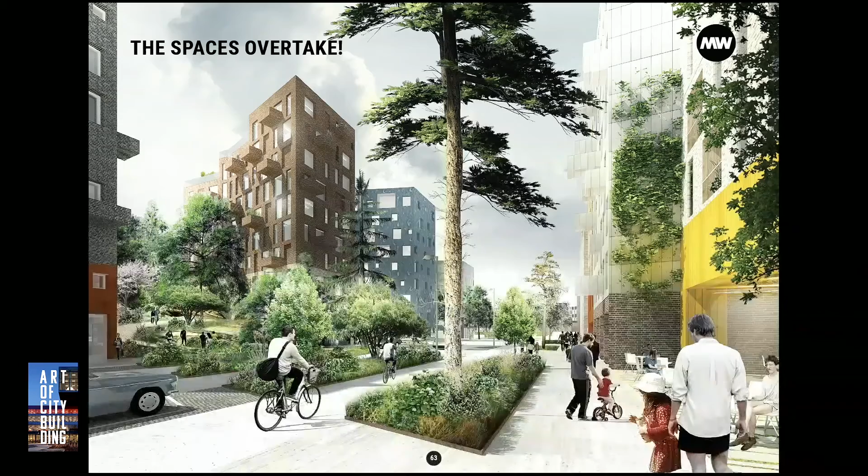This makes it also possible to connect the streets and the places with its surrounding context. So in the end, if we start to think across the streets, we can let the places take over. And again, we don't build for cars, we build for people in the cities. Thank you.

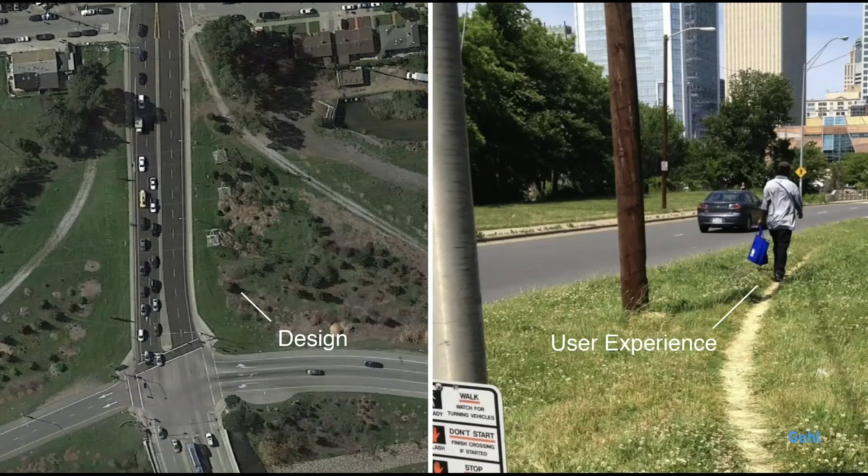Despite this, this is too often still the case. We don't actually look at how people use space. We forget about their needs in the traditional planning process. It's still very building and form driven.

So we really believe that any planning and design process has to start with this eye-level perspective that, again, we've heard a lot about. This isn't just about looking at what we can see. It's thinking about, as a pedestrian, what do you hear? What do you smell?

Where do you feel comfortable? How much stimulation are you experiencing when you walk down the street?

So really, what this presentation is going to be about is how we should all go back to school, study biology and physiology, and then we'll be done—we'll fix our cities that way. That's a joke, we don't have to do that. It's actually not that complicated.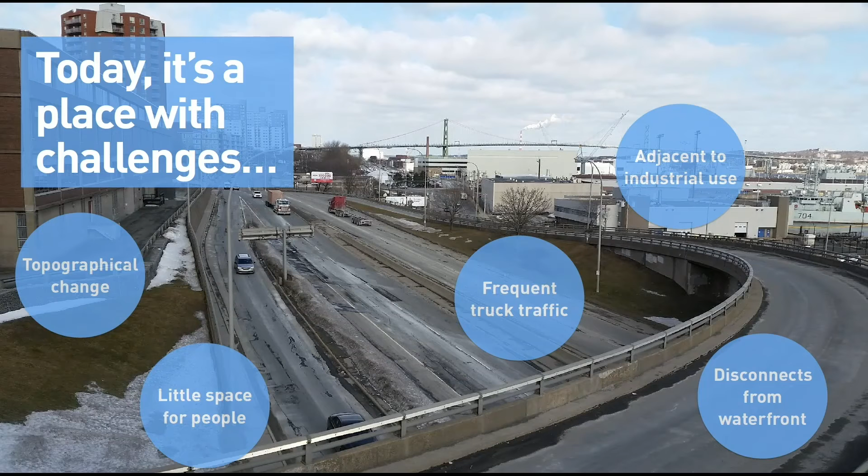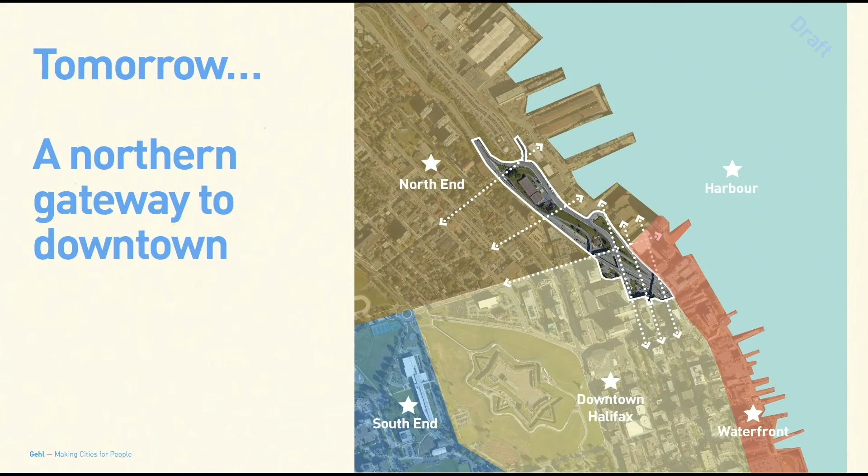Little space for people, lots of truck traffic, a lot of different needs to accommodate. But tomorrow, we're really looking at an area that could become a clear northern gateway into the city and a walkable destination and place.

And as challenging as the area is, it's a huge opportunity—I don't think anybody's contesting that. One of the things that really has stuck out to me about this area is that the second it was built, it sounds like there was a realization it was a mistake. I think we have a real opportunity now to think about how do we plan for today and for today's needs, but also think about what will happen in 10 years when this is actually built out. What is our city going to look like?

Are we going to use trucks the same way? Is the port going to be in the same place? We have to think about addressing today's needs as well as being flexible and able to iterate as our cities change. What we're really looking at with this design is how we can move from a car-oriented to a people-focused place, from something completely nondescript to a real destination, something that connects both people and places together.

We want to hear from you as well: what would those people-first targets look like in the Cogswell district? What is the vision for life and the experiences that we want to have there that can drive this?

Another thing I was struck by in Indy's presentation earlier was this challenge to really think about what is the societal challenge that we as planners and designers can really tackle. Public spaces cannot solve all of our problems—there are much larger systemic issues at hand. But when we have an opportunity like this, what are some of the community needs that a public space, when we zoom in, can really touch on? I'm going to share a few examples of what our work looks like in practice and provide some inspiration to this area.

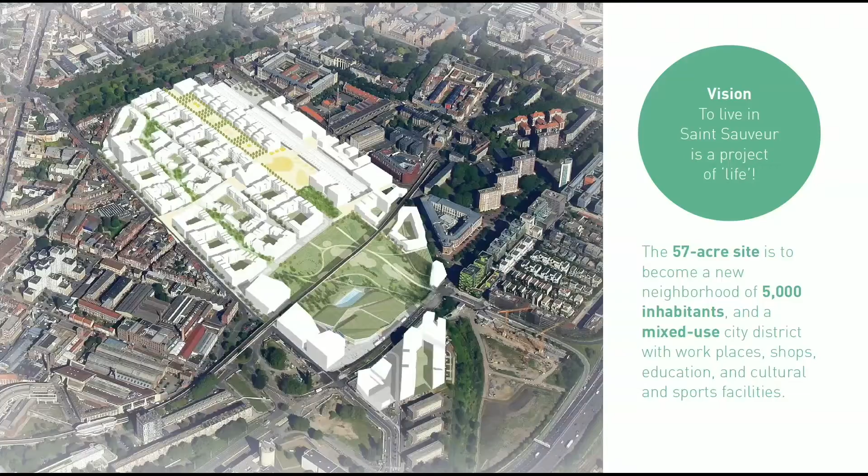One is a project in Lille, France. Gehl won a competition with a group of technical partners to redesign and develop a master plan for this 57-acre site, a former goods yard. Nothing happening there right now on the periphery of the city, with ambitions to become a residential area for 5,000, very mixed use. This is where it is in the city.

So we started by developing a plan and a vision that really defined what are the values here and what is the life that we want to create.

After this, we developed a strategy to collect data. As you saw from the maps, there aren't a lot of people—nobody living there right now—but this area was adjacent to many communities, so we collected data on what people did and what people wanted. From there, we developed designs that could respond to those needs, and figured out how those designs can shape the long-term plan as well as be tested out in the short term. Engagement ran throughout that process.

So some key takeaways for us in this process, which is ongoing, is the value of engaging early and often—not just in public forums by asking people to respond to designs, which is important, but also giving them opportunities to interact with the site, to make things, to develop their own ideas, and really figure out ways not just to solicit that input, but to incorporate it into our plans.

The second is to be a good neighbor. A lot of these things are already being thought about here, but to really think about how do we connect socially and physically to the spaces around us, what's happening in those spaces, what's missing, and how can we make sure that this new development actually complements the needs we're seeing.

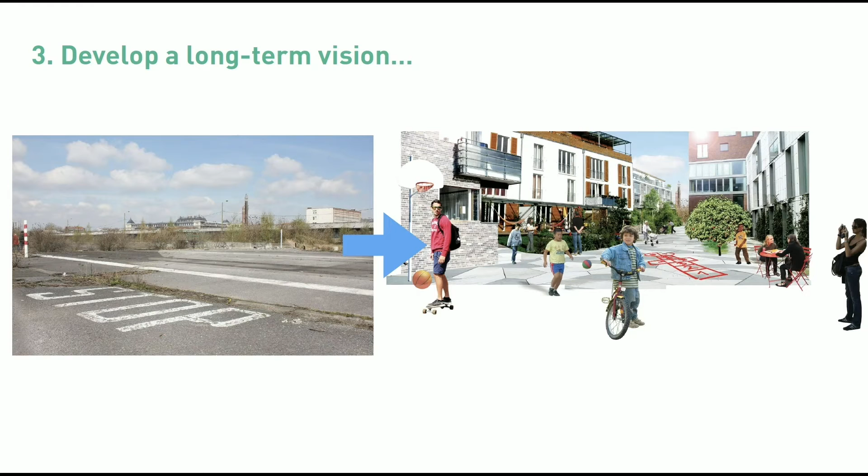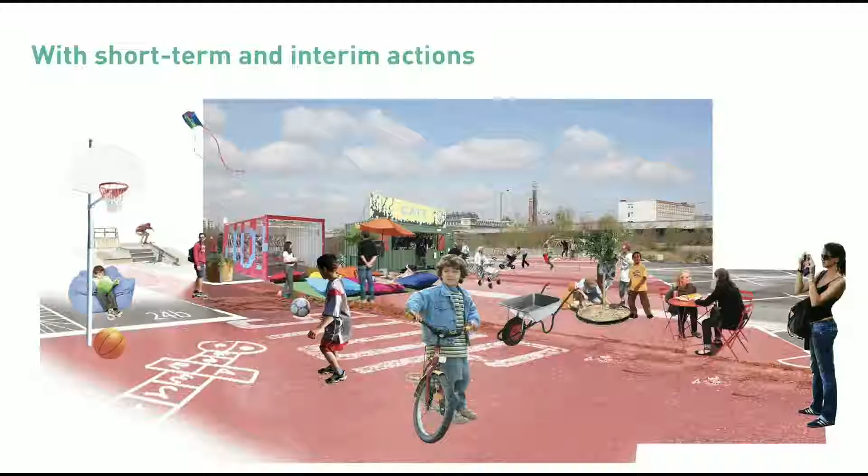The third is to develop a long-term vision and have a clear sense of what we're going for, but at the same time have short-term and interim actions that we can test and use to activate the site, get people there, start to change perception of what's happening, and most importantly, study how people are using it, how they're responding to these designs, whether we're on the right track, and where we need to refine and go back to the drawing board.

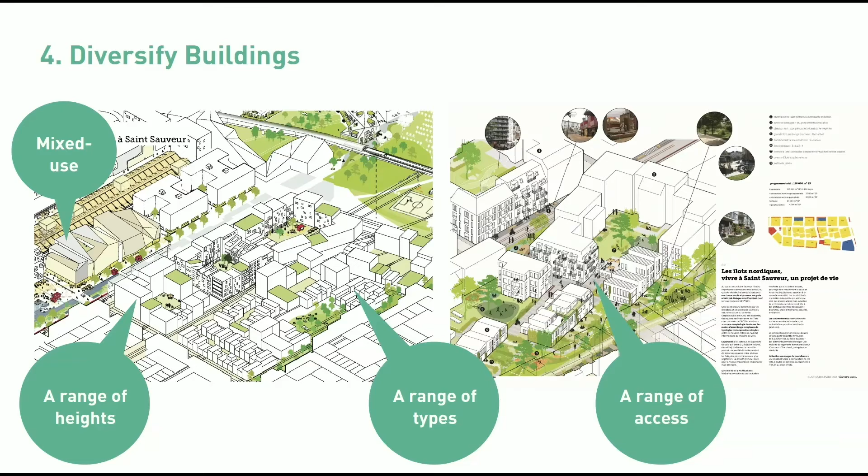It's also important to diversify the building type and think about how you can integrate and respond to the existing city while also having a range of heights, different building types, and a range of access. A lot of times in cities around the country where we're working, everybody wants mixed use. This is great—this is different than it was in the planning world 15 years ago. But a lot of times that mixed use doesn't actually lead to a variety or range of building shapes and forms, and that's essential as well.

And we can achieve the same densities that we can with single towers or single-form buildings in many different varieties, like courtyard buildings or higher buildings on the corners.

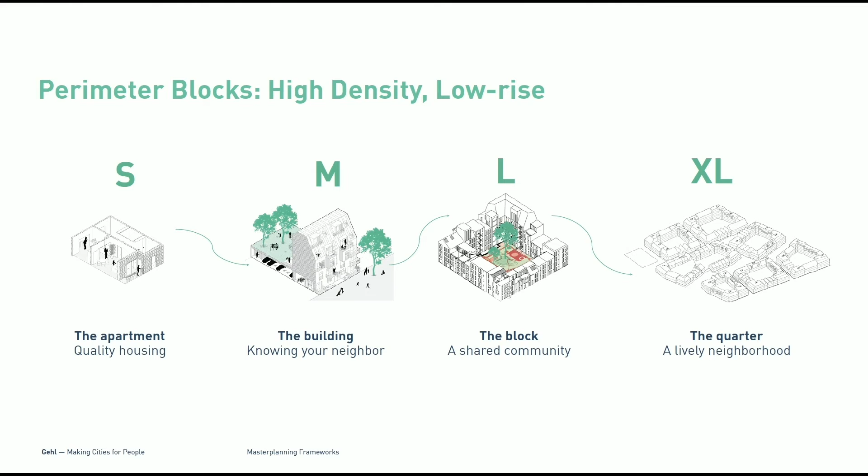The last point is about a hierarchy of public space. And I think another thing we often see is this sort of prioritization of quantity over quality, and this desire to just say, oh great, we're going to make 50% of the project open space. We need open space, and that's important, but if those spaces aren't clearly defined and articulated, they can often be underused and inaccessible to people.

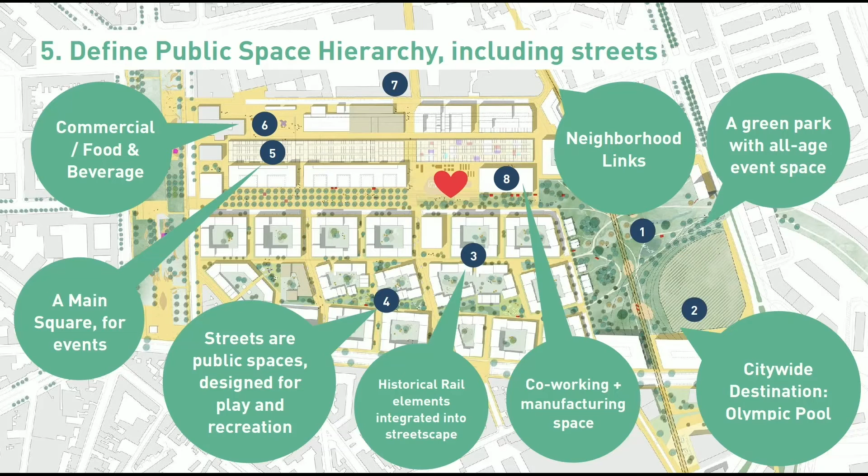So in this plan, we really spent a lot of time defining what are these zones, what are the complementary areas that we need. A citywide destination is going to be an Olympic pool, but then we need the smaller neighborhood spaces, the streets where kids can play with their neighbors. We need the links to the neighborhood, we need places for commercial food and beverage. Sounds pretty simple when we think about what works in a city. Downtown Halifax does a lot of this really well, but unless we're really intentional with it and define these things from the outset, it's easy to overlook them in the design process. So these are what some of those spaces will look like.

Another example is about how we can really use pilot projects to iterate, to activate a site, and to test out ideas. So Gehl did a project in Lexington, Kentucky a few years ago. We did a public space, public life plan for the entire downtown area.

One of the key findings for us was that there were very few children spending time in public space, although a much higher percent live in the city. But where we did see children was in places they shouldn't be. Lexington is a southern city, and it gets really hot there, and we happened to be there in the summer, and we always saw kids playing in this fountain, and there were signs everywhere that said no swimming, dangerous. Their parents were with them, they were trying to keep them safe, but they didn't have anywhere else to play. There are public pools in the city, they're hard to get to, you have to pay to get into them. If you have 5 kids, entry for all of them is really expensive. So we saw this happening in this fountain here, just on the periphery of downtown.

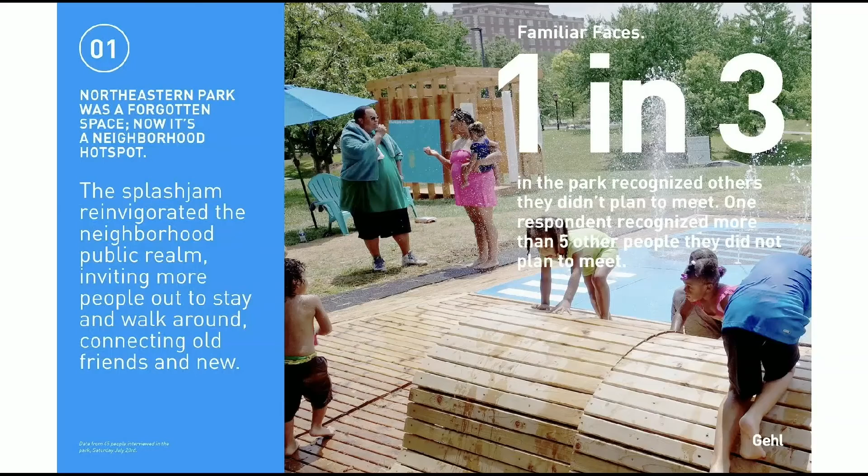Some of the key findings were that it made this area become a neighborhood hotspot. People were visiting much more than they had before on a weekly basis, from hardly ever going there to 70% being there once a week. And people were recognizing each other and meeting new people. 1 in 3 people said that they saw a familiar face. Somebody talked earlier about loneliness and that challenge in cities, and I think that increasingly comes up in our work. Whether or not you're interacting with someone, you don't have to talk to them to interact with them. Just being in the same space as other people is good for our mental health.

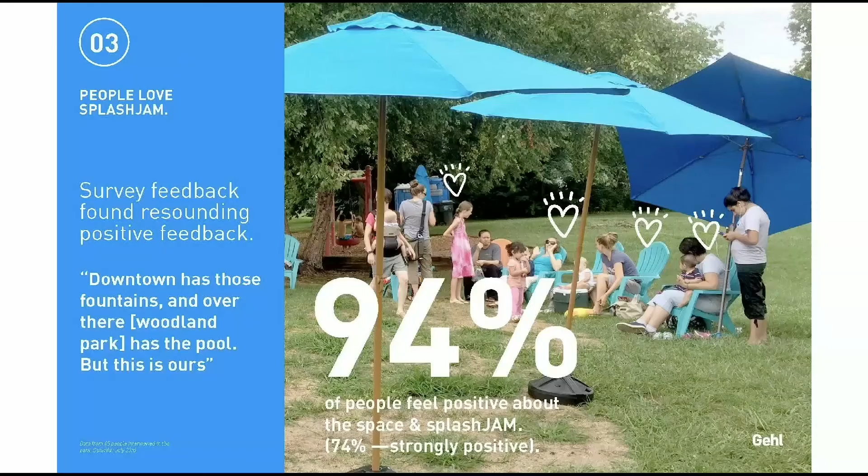People kept saying how much they felt they were meeting their neighbors and coming together. When we looked at who was there in terms of demographics, we saw more income diversity and education diversity, although there was still disproportionate representation of higher income residents.

But this was only up for 2 months, so it was a start. The city didn't reinstall it this year, but they're using it to figure out if they should put a permanent splash pad into this park, and these methods can continue being used and tested in other projects.

One last project: as some of you may know, the Cogswell District planning initiative is a huge initiative, a huge opportunity, and could take years to build out. We wanted to share another example of how interim activation can be used in a site. Similar to Splash Jam, this project was used to put a place on people's mental map, show it's no longer a place for cars, this is actually somewhere you can come and spend time, and also test out what works and constantly monitor and see how people use a space, what they actually need.

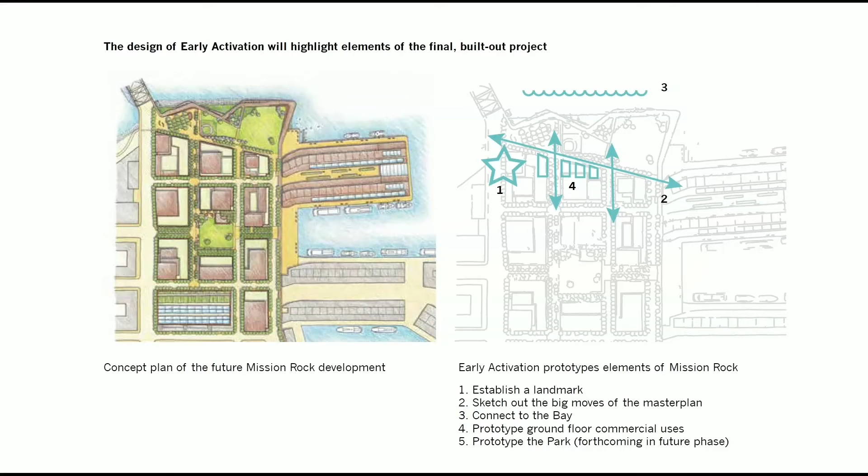So in San Francisco, the San Francisco Giants won the right to develop a surface parking lot across the street from their stadium. This is on the waterfront and had been surface parking, really wasn't on people's radar as a place to spend time, but the Giants wanted to turn it into a mixed-use residential development. Again, it was going to take years for this to happen, so where to start? They wanted to just get people there.

We helped them make a concept plan for how they could activate it in the short term. They had three distinct goals about recreation, commerce, and culture that fortunately all nest together really well in a public space activation project. They wanted to put this area on the map, so there was a whole communications and branding component to this, and figure out how they could prototype and test.

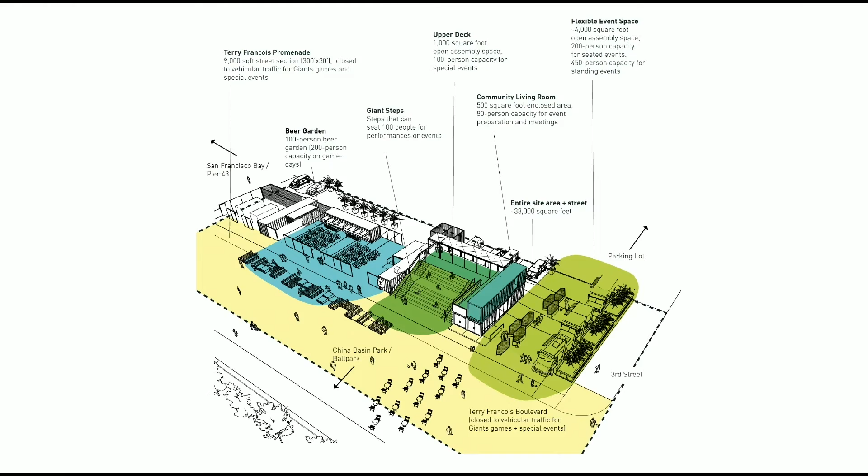So again, as we think about how does this land in Halifax and in Cogswell, what is the public life that we want to see in this new district? And how can we start activating the site and inviting people to spend time there from all across the city in the short term?

Lastly, just as a joke: what is the date while you wait in Cogswell? This is from the New York City subway. Somebody sets this up while you're waiting for the subway, and you can play Connect 4 and flirt with somebody, perhaps. But what is the version of this on the scale of the Cogswell district? Thank you.